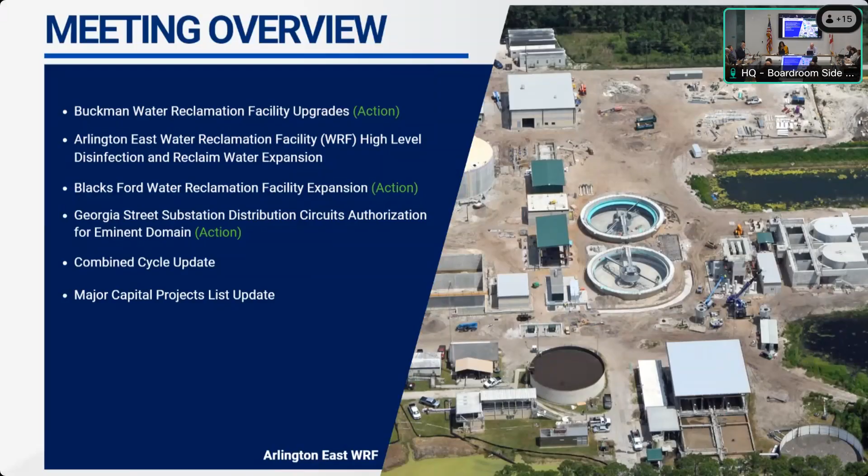Great. Okay, well, why don't we proceed to the Buckman Water Reclamation. Hai?

Good afternoon, Chair Baker and Mr. Morales. I'm here today to provide updates on the Buckman Water Reclamation Facility upgrade projects and to request approval from the committee to award to the contractor the necessary amount to complete the work.

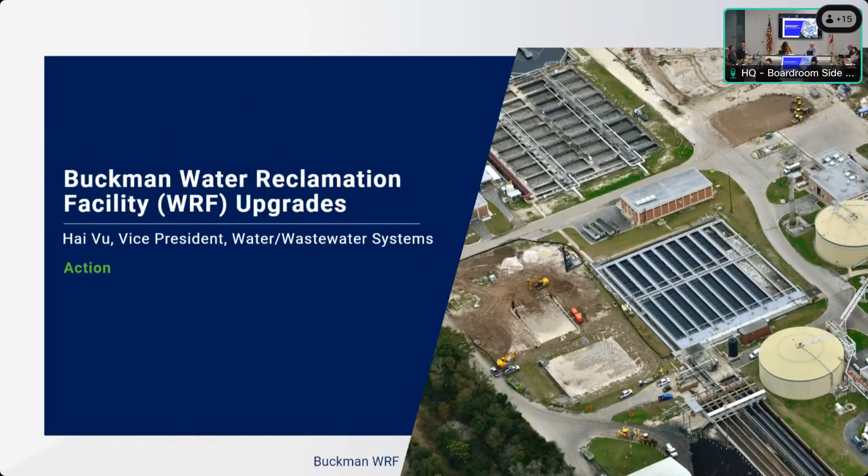As the committee may recall, JEA owns and operates 11 water reclamation facilities with a combined wastewater flow of approximately 80 million gallons per day. Buckman is the largest, treating about 30 MGD. It also includes a residual management facility, which processes biosolids from Buckman and 8 other plants. It produces a Class AA pellet, which is the highest level of treatment for biosolids, not only meeting EPA guidelines for land application with no restrictions, but also meeting the state's restrictions on specific metals.

The pellets are sold to a third-party vendor, Green Technologies, which makes commercially available fertilizer under the brand Green Edge. The revenue is nominal, we receive about $10 per wet ton, which is about $100,000 per year, but we avoid millions of dollars in disposal costs.

So as regulations get stricter, availability of land gets diminished, the cost can increase dramatically from approximately $17.8 million this year to over $70 million by 2045.

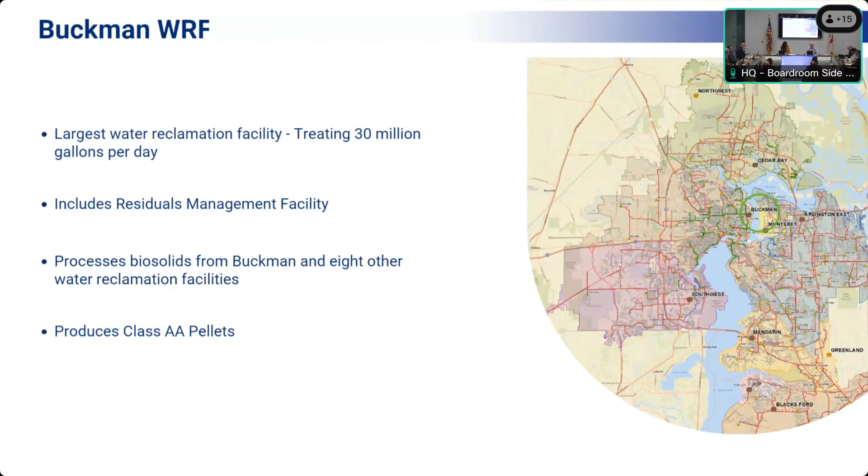The committee may also recall that the Buckman upgrade projects actually consist of 8 discrete projects. The Buckman biosolids replacement project is the largest, it overhauls the entire biosolid system, providing redundant dryers and continues to produce the Class AA pellets. Construction for that project is approximately $274 million, and it's being delivered via Construction Manager at Risk, or CMAR, by Wharton-Smith.

We added 7 other projects to the contract because of cost savings, increased site coordination, and more efficient scheduling and project management. This past May, the board approved the final GMP for the biosolids replacement project, reduced the cost for the blower and the UV system projects, and approved the final design cost for the aeration, basin air header, and diffuser replacement project.

I'm pleased to update that the biosolids replacement project construction is going well, and the blower system, the UV system, the fine screens, and the operations and maintenance building replacement project are all complete or nearly complete.

So today's discussion will focus on the projects whose design have reached 90% and for which we have received guaranteed maximum prices from the contractor. These are the projects highlighted by the green box on the screen: the sludge holding tank rehabilitation, the biosolids facility rehabilitation, and the aeration basin air header and diffuser replacement.

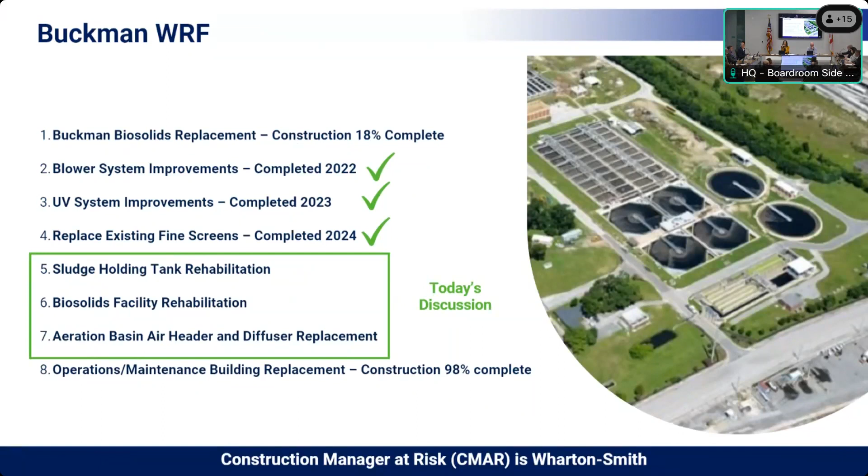When we last presented to the board, we also provided estimates for the completion of the 3 projects at $78.5 million, with a promise that we will scrutinize, value engineer, and adjust costs accordingly. I'm pleased to say that the actual amount requested of $67.97 million is $10.5 million less than estimated.

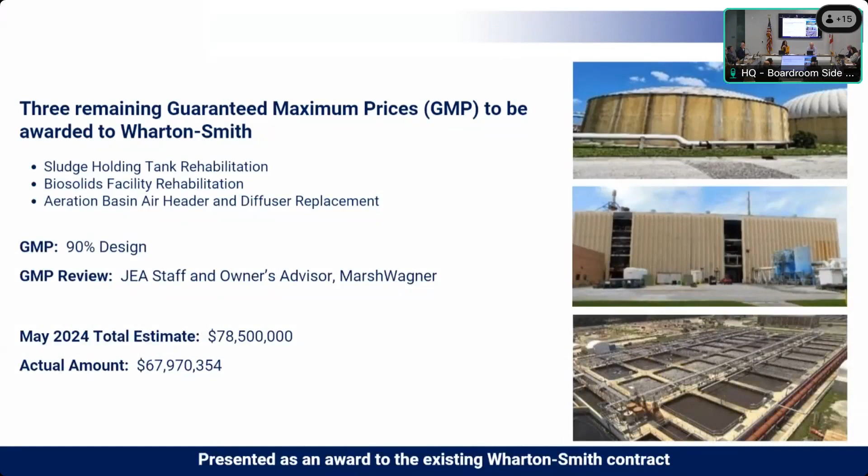The raw holding tank retains the biosolids from Buckman and 5 other plants. Built in 1960, it has several major issues. It is filled with rags, it is oversized, and it was built on piles, and the condition of the pile supports is unknown. The scope of this project includes building a new tank that is sized correctly, built on grade, and includes the improvements shown on the screen.

Back in May, our estimate to complete this project was $41.3 million. We were able to further define the risks and developed risk mitigation strategies to decrease this risk, and in turn reduce both the contractor's contingencies and the owner's allowances. Our current cost to complete the project is $37.6 million, a reduction of $3.7 million.

Before you leave that, let me ask a couple of questions. Number one, did we change the capacity or anything? How were we able to reduce the cost so much? As you go further into the design for this project, mainly the contingencies for the unknowns, we were able to reduce those unknowns as we get further into the design, and then we're able to develop the schedule and the items that the owners can accept, and things like the weather and the schedule. As you further develop that, you were able to define the schedule and sharpen the pencils further.

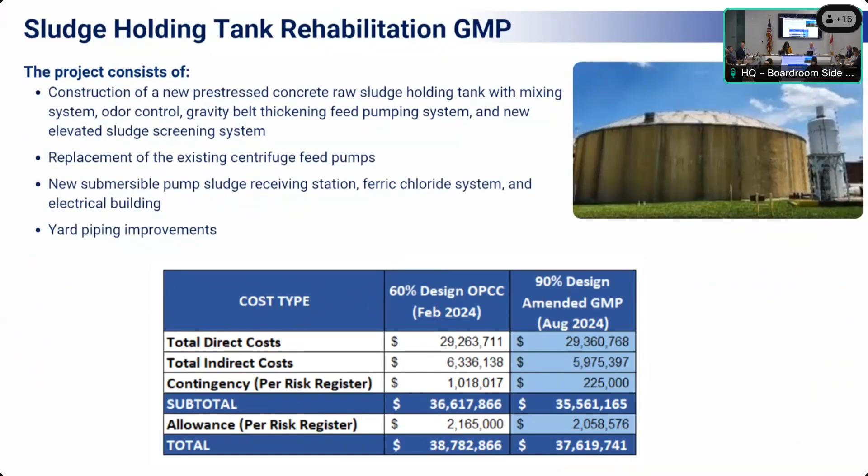The existing biosolids facility houses the major equipment that thickens, dries, and pelletizes the biosolids. Built in 1958, it has reached the end of its useful life. A new facility will be completed in 2028, but there are several critical components that will not last as long and represent significant risk to the safe and reliable operation of the facility. This project assesses the condition of the existing building and process equipment and any needed repairs and modifications to keep them in service until the new system is in place.

When we presented this project back in May, the estimate was $13.7 million, but we promised at that time that we would scrutinize and value engineer the project. We did manage to reduce, and in some cases eliminate, the scope, and in turn reduce the cost by nearly $10 million. The cost to complete is now $3.8 million.

Obviously it's a very different project now. If it's 3 million, what was the 13 for? Yes, sir, so we evaluated everything from the floor to the coatings, to the electrical instrumentation, the roof, the belt thickener, and determined if we can extend the life by other means or do without until 2028. Okay, the rescope, yeah. Yes, sir. Okay, thank you.

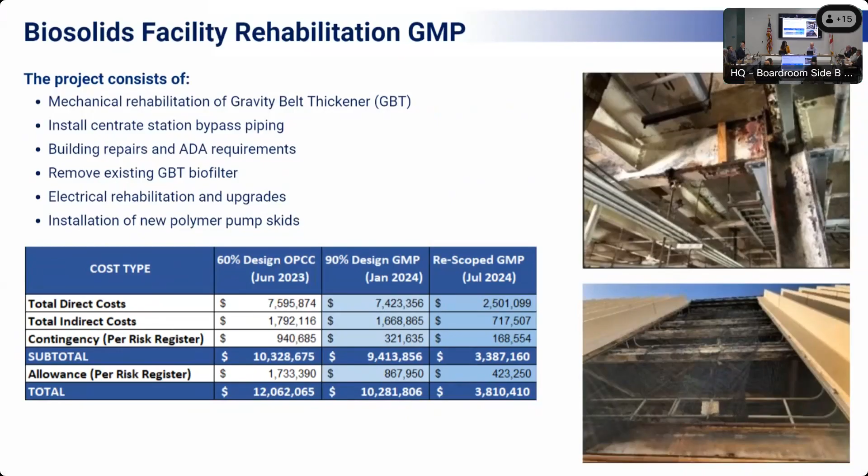The air header and diffuser system provides oxygen to the microorganisms for wastewater treatment. The aeration system was built in 2001, upgraded in 2014. Due to the accumulated grit and turbulent flows, some parts have failed, resulting in less effective treatment. The scope includes removal of grit and replacement of the aeration headers and diffusers. The estimate in May was $23.5 million. Because of increased material costs and the extended 4-year construction schedule, we can only shut down one basin per year due to treatment needs. The cost to complete is now $26.54 million, an increase of $3.04 million.

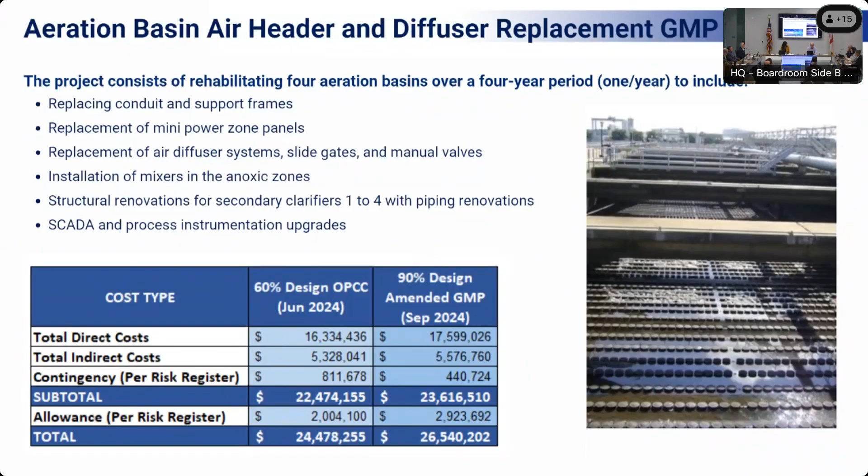Shown on the screen is a tabular summary of what I just talked about. In March of 2024, the board approved the ratification for $104.1 million for work that had already been started. In May, the board approved the final GMP for the biosolids replacement project and approved the final design for the aeration basin air header and diffuser replacement project, and reduced the cost of two others. The estimated cost to complete at that time is shown on the next column, and the last column shows today's request.

In summary, staff is requesting the Capital Projects Committee to recommend to the board to approve an award to Wharton-Smith for the remaining guaranteed maximum prices associated with the Buckman WRF upgrades project contract, including construction of a new raw sludge tank, aeration basin rehabilitation, and biosolids facility rehabilitation, in the amount of $67,970,354 for a new contract total of $377,229,828.27. Thank you, and I will be glad to answer any more questions you may have.

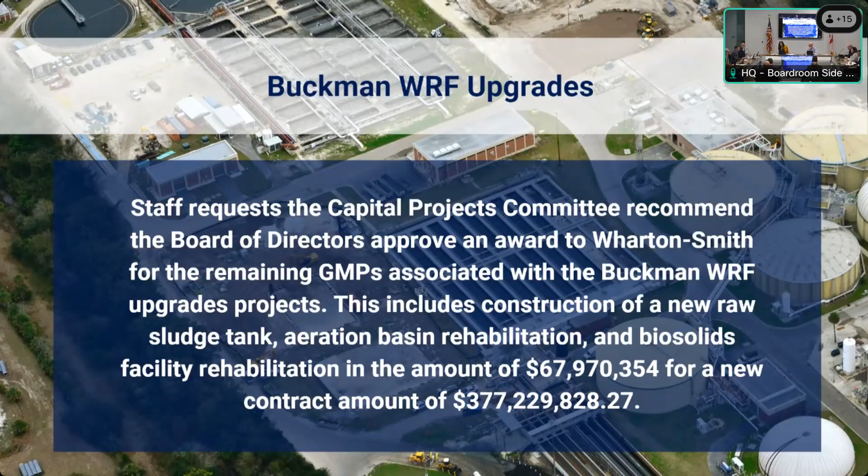Good afternoon, Chair Baker, Mr. Morales. My name is Peter Doherty. I'm the Senior Manager for Project Management within the Project Engineering Construction Group, overseeing the plants and pump stations on both the water and wastewater side, production wells. So we oversee that project management staff.

The project we have before you today is the Arlington East Water Reclamation Facility high-level disinfection and reclaimed water expansion. The Arlington East facility was built in 1976 and is the second largest in JEA's fleet, treating 20 million gallons of wastewater per day.

The facility will serve as source water for the H2.0 purification demonstration facility. Recent improvements to the Arlington East facility include a phase 1 project, completed in 2020 at a cost of approximately $19 million. The board members may also recall we presented the phase 2 improvement projects in May, which has now been re-advertised for bids, due on November 19th.

Was that the one where we only received one bid? Yes, sir, that's it. The estimated cost for the phase 2 project is $97 million, which you may recall was brought before you previously. We'll be bringing that back to the board at the February meeting.

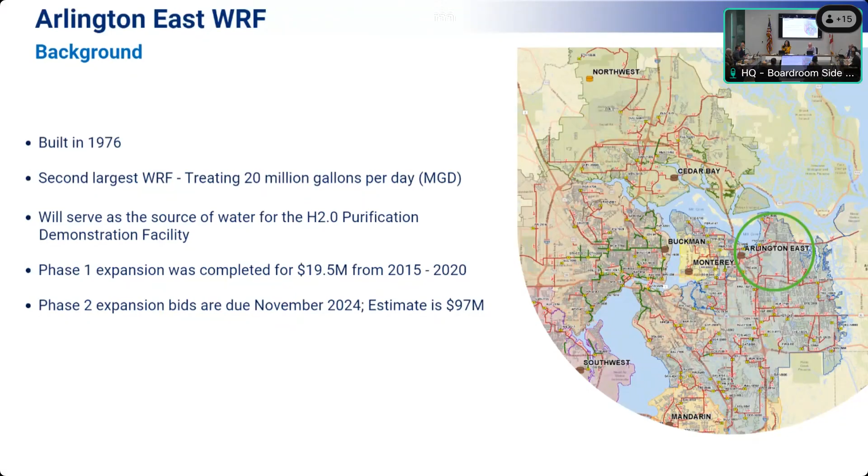Is it dramatically different? Yes sir. So the project list we had -- go ahead, Hi. So there are different projects, sir. The $97 million is the improvement of the influent structure and the clarifiers. And the project that Peter is presenting on now, the disinfection part, is the tail end of the project. So they are different projects.

It's a big change. So perhaps I can clarify that a little bit. The design estimate at the 162 is at 10%. So we had an early conceptual estimate, right? And then we had the engineer perform that 10% opinion of probable cost for construction. So what we're working on is developing a more robust cost estimating strategy with our consulting partners to make sure when we get to this early phase of design, we've got a value for the construction that we feel is going to be consistent throughout.

So we worked real hard on developing some additional tools with our teams internally to further evaluate it, along with our consulting partners, utilizing risk registers and other means we've developed over these other projects we've been working on, because we've seen this as a challenge as the price continues, and it's hard for us with our budgets -- how do you keep that right? So we're confident the number we have here before you today should be our cost for construction. We've added escalation, we've considered everything we feel we need to, and we'll continue to further work on this. We'll bring this back before the board in the future.

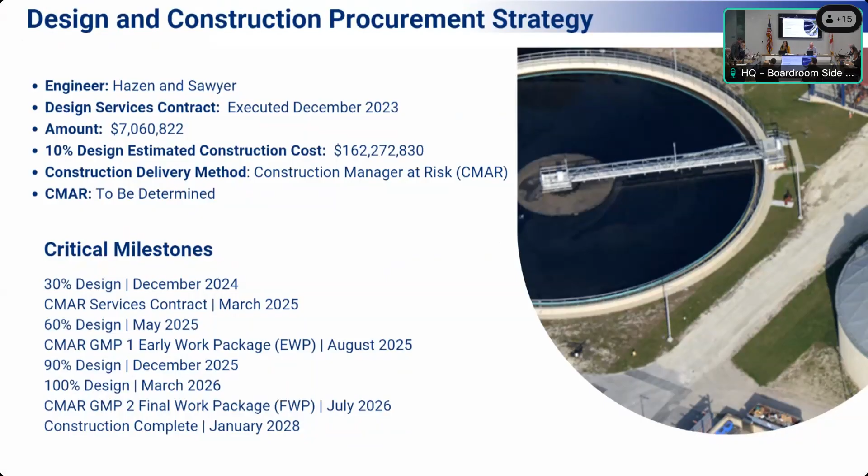Good afternoon, as I previously stated, I'm Rob Zamataro, Director of Planning and Development. I'd like to highlight one of JEA's expansion projects at Blacksford Water Reclamation Facility. This facility is located in northern St. Johns County and provides service for approximately 40,000 of our customers. It treats about 6 million gallons a day, and it's one of the fastest growing regions of our service area. This facility was previously expanded from 3 to 6 MGD and was completed in 2018.

So the current expansion is going to go from 6 to 12. We're at about 30% design. This plant is purely driven by future flow projections in this area. Growth is still moving along down there, and we have plenty more to go.

The project consists of two 3-million-gallon oxidation ditches, three secondary clarifiers, ultraviolet disinfection, electrical control systems, and an effluent management system. I'd like to discuss that effluent management system. Historically that used to be a pipe that went out to either a wetland or a river. In this case, this is a 100% reuse facility, which means tanks, pumps, a significant investment. So even though this is a wastewater and water reclamation facility, there is a very large reclaim supply and reclaim component to this project. It's more than just wastewater -- I like to look at it as not only a wastewater project, but a water supply project.

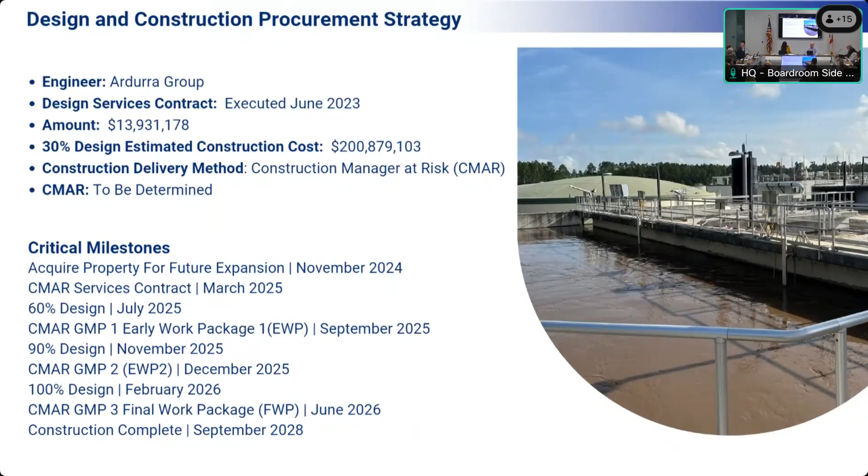I think I read somewhere that we're currently serving approximately 40,000 customers. Yes. And I've heard 250,000 people will be in that part of the world, north St. Johns County. Are we building it big enough? Yes, yes.

If you look at the map, notice that region to the right-hand side of US 1, the Nocatee area, and the light brown, which is the St. Johns County region we serve — we have the ability in this area to send a large portion of that flow, about 2 to 3 MGD, up to Greenland. So we have flexibility in these areas to serve part of the region from Blacksford, Mandarin, and Greenland. That flexibility allows us to delay projects until they're absolutely necessary. There's a financial driver, and also a service consideration, since we don't know exactly where growth is going to occur. If growth occurs in one area or the other, we have the ability to shift flows.

How we approach that from a planning perspective is we look at what the build out is. We're at 6 now. As soon as Greenland is complete this coming fiscal year, we will actually be moving 2 MGD from Blacksford over to Greenland, which will free up additional capacity. So it is tight. To put this site in perspective, it was the original site for the Cimarron subdivision, built in the late 80s, early 90s for United Water. I don't think they anticipated this size of a facility on that little site back 30 years ago.

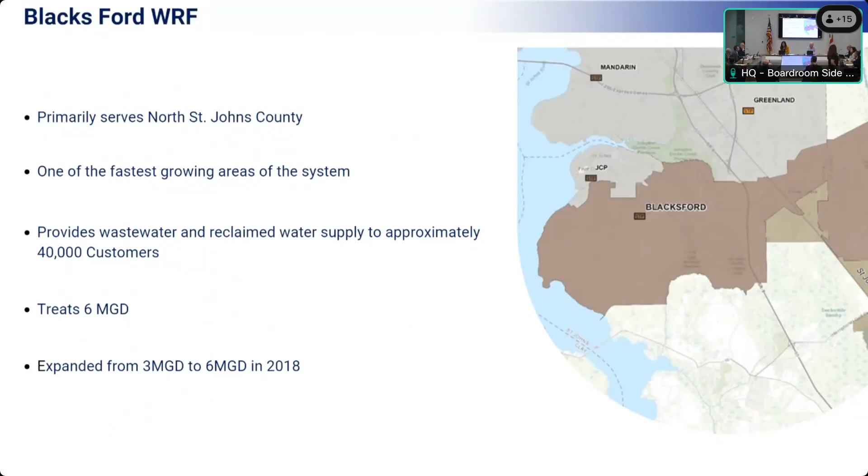Jordan? Thank you, Mr. Baker. So to accommodate that expansion due to system growth, let's get to the slide. JEA has identified approximately 23.6 acres adjacent to the Blacksford Water Reclamation Facility. While we considered other sites in the area, after initial due diligence, we found the subject site to be the most suitable for the expansion.

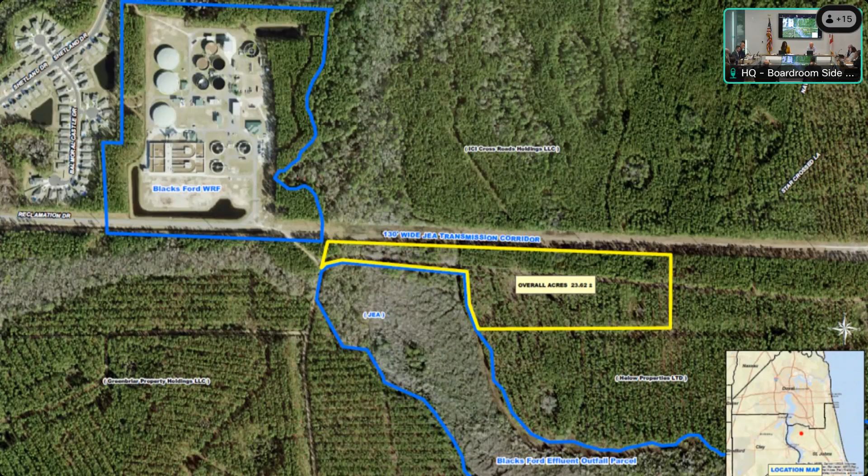JEA received an appraisal on the subject parcel in the amount of $4.66 million, and JEA and the seller have agreed to a purchase price at the appraised amount. At the seller's request — the seller is Hilo Properties Limited — JEA has agreed to a landscape buffer on the easterly and southerly boundaries. The proposed purchase and sale agreement with Hilo Properties has been provided on page 54 for the board's consideration, and staff is requesting that the committee recommend board approval of Resolution 2024-56 to acquire the subject parcel.

Questions? No questions. Can we move to get approval? Second. All in favor? Aye. Okay, thank you. I like it when they're not asking for more than the base value. It makes it easier. Thank you.

You okay, Mr. Baker, to move on to the next item? Please. All right, thank you.

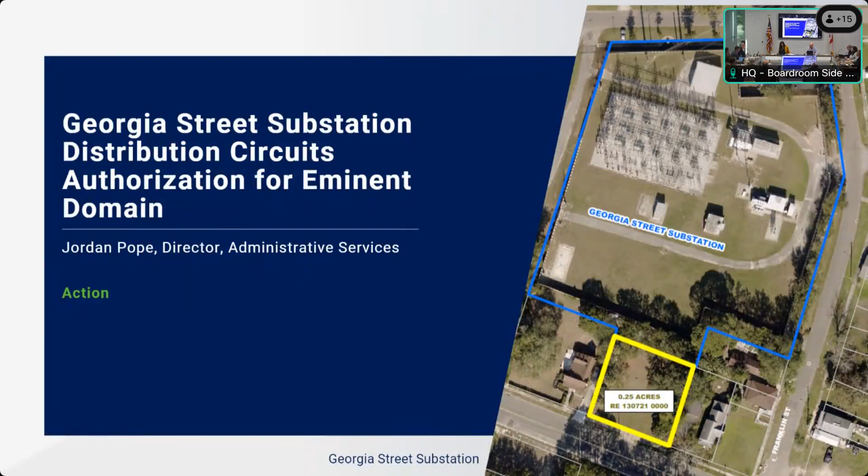JEA has identified approximately a quarter acre adjacent to the Georgia Street substation needed to support the expansion, operation, and continued reliability of the electric system. The Georgia Street substation is located just north of the Arlington Expressway near the Sports and Entertainment District. With current and projected load growth in the area, JEA plans to expand the substation to meet future demand. While the current site can accommodate substation expansion, this acquisition will support future electric circuits between the substation and the load growth areas. JEA considered other sites in this area, but the subject property was found to be the most suitable. To date, we have been unable to successfully negotiate a purchase agreement with the property owner.

Condemnation authority is requested to ensure that any delays in negotiations or acquisitions do not jeopardize the project schedule. JEA's current appraisal values the subject property at $40,850, and should JEA proceed with eminent domain action, additional fees and expenses may be incurred consistent with Florida statutes. Staff is requesting that the committee recommend the board approve condemnation action as outlined in Resolution 2024-62 to acquire the necessary property rights for this project.

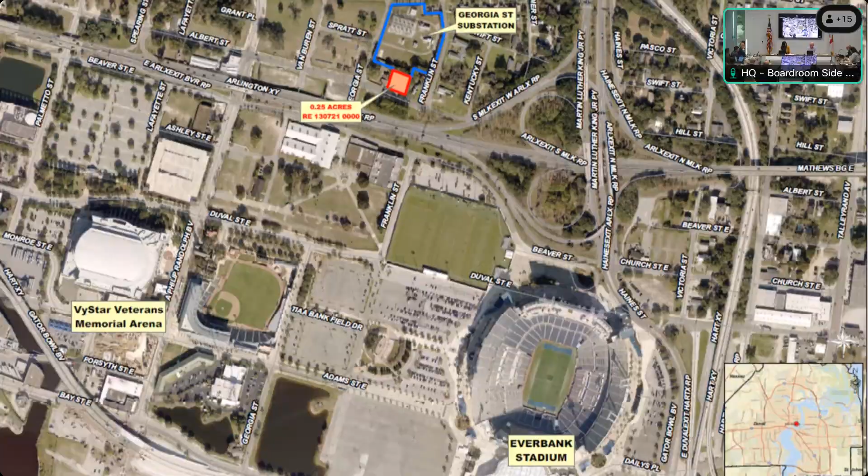That's if further negotiations prove unsuccessful. We will continue to work with the property owner. What about those two properties? Are those two residential properties on either side of it? Yes, sir, they are. We have spoken with the adjacent property owners.

The site we're bringing to you today is the preferred route from the engineering group. What we determined was that because this is the only site adjacent to the substation without a single-family home, it was the most advantageous for the project from a negotiation and cost perspective. Unfortunately, eminent domain can get very expensive. Would it be worth talking to the other owners if you fail? We have spoken with the other property owners, and after they both took a path that may require condemnation action as well, we went with the preferred route for engineering.

Thank you. What do you figure it costs us to do a condemnation? I know we have to pay their attorney's fees. Yes, sir. Real estate will frequently look at this, and not always with items that come before the board, since your threshold is fairly high. We often look at the merits of settling above appraised value because of the cost of condemnation. So we will look at our attorney's fees and staff time, the property owner's attorney's fees, which we would have to pay consistent with Florida statutes.

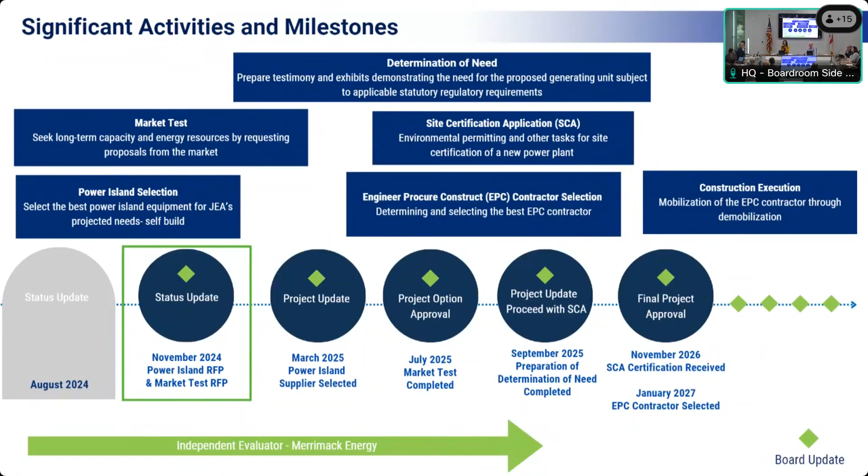In September, we initiated a power island equipment solicitation, which is combustion turbine, steam turbine, and some of the major equipment. Our teams had the opportunity of visiting three factories in North Carolina, South Carolina, and Georgia of different manufacturers to encourage participation. I want to thank the OGC team, Rebecca, who is in this room. She's been heavily engaged helping us with the terms and conditions for both greenhouse gas regulations and the commercial aspects to ensure our terms are understood.

We're expecting the bids for the Power Island on December 4th. While three manufacturers expressed intent to bid, we believe two of them will. One rescinded their alternative to proceed, but the two that are asking questions and helping us through the process are the best providers we have out there. So we look forward to getting that bid completed, and their evaluation will proceed after that.

In tandem, we initiated the market test solicitation on October 1st. This market test is looking for different types of solutions outside of a self-built option, including a build-transfer of ownership, jointly owned arrangement, a power purchase agreement, or an asset purchase as listed on the presentation. Along the way, the independent evaluator has been completing reviews to ensure we're being fair and equitable to the process. We received very good feedback, and that was incorporated before we released this market RFP.